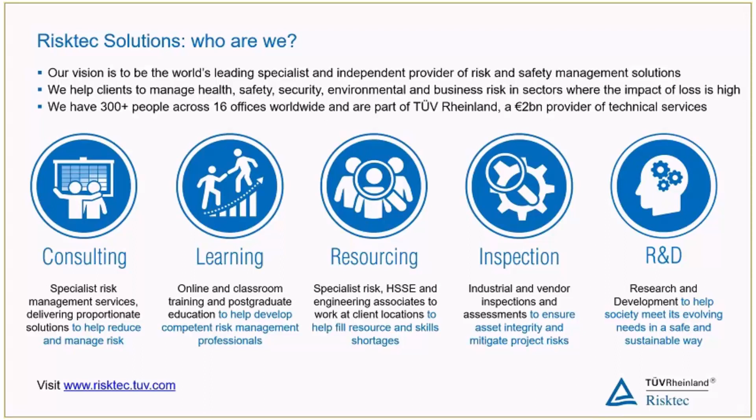Okay, so I'd just like to introduce our speaker today, John Wiseman. John is a principal engineer based in our Warrington office here in the UK. He has over 14 years of quite varied risk management and technical safety engineering experience. That covers a number of high hazard industries, including oil and gas, civil nuclear and defence. Okay, John, over to you.

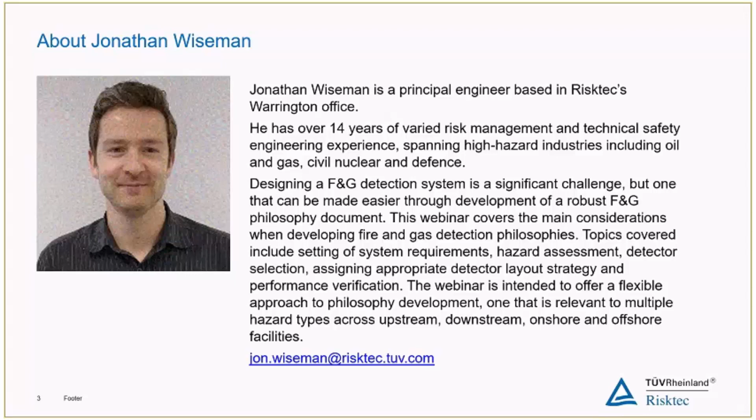Okay. Thank you, Steve. So as Steve said, my name is John Wiseman, and firstly I'd just like to thank everyone for taking the time to listen in on this webinar. I really hope you find it interesting and well worth your time.

Okay, so as Steve said, today I'm going to be talking about the main considerations that need to go into the development of a fire and gas detection philosophy. So I'm not going to talk about the exact contents of these documents, but I am going to cover the main elements and the main process we must go through in both developing a fire and gas detection philosophy and implementation of a fire and gas detection system.

So as we know, during the design stage of projects, many different types of philosophy or design basis type documents are developed, and this is primarily to assist the project as it progresses further into design. However, of these philosophy type documents, perhaps the fire and gas detection philosophy is one of the more contentious or well debated documents. So those involved in fire and gas detection design will be well aware that there are many different opinions and many different solutions in the way that these systems are implemented. So with this, the fire and gas detection system design has a number of challenges.

So the main challenges, I'm just going to go over them now. The first one, so I'm talking about outside process areas here. So the first challenge, what we see when we're implementing a fire and gas detection system, is the lack of publicly available guidance. So whilst guidance does exist for indoor locations, for example here I'm showing NFPA 72, this is mainly a prescriptive approach and is more suited for indoor locations where we have more of an understanding and the behaviour of the hazard is more predictable. We know it's going to be contained within the building itself. So a fire detection system, for example indoors, can follow a more prescriptive regime.

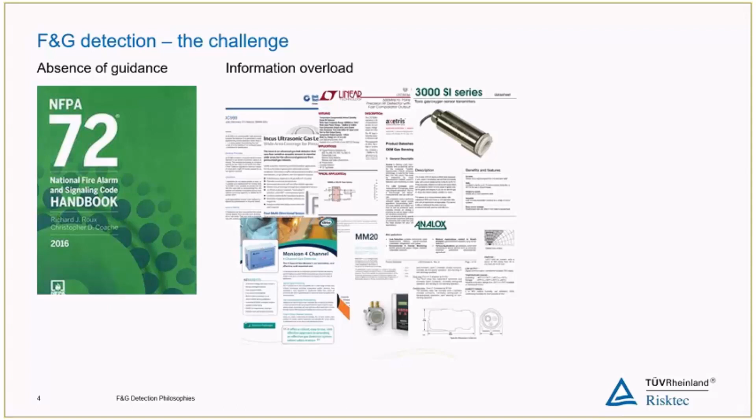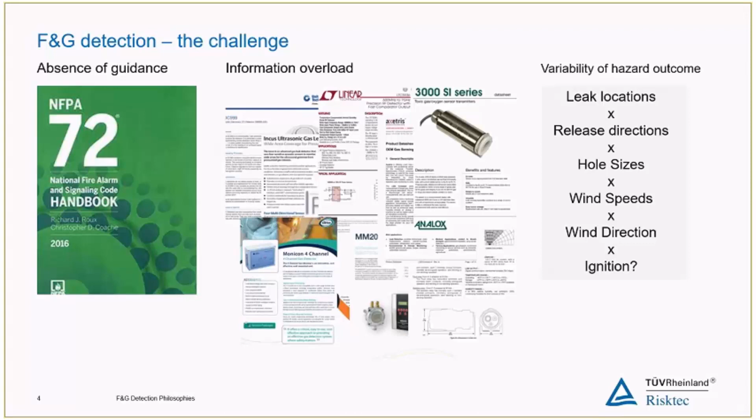Another reason why fire and gas detection design can be a challenge, and perhaps the main reason why historical performance of these systems has been relatively poor, is due to the variability of the hazard outcome. If we take a process facility, for example, we have many different leak locations and release points across the facility, then release directions, different sizes of release, and external factors such as the speed and direction of the wind, and if the release is flammable, whether or not it hits an ignition source. All of these different inputs factor together to give us an unmanageable range of scenarios for which we must design our fire and gas detection system.

Another reason why it can be a challenge is due to the range of different types of facilities in which these systems are installed. Taking two extreme examples: onshore facilities where we've got more space, evacuation routes, and more space for those. Muster points can be located further away from the process areas, and we can also separate process units away from each other. Onshore facilities are also typically more chemical processing, in which case we might want a more controlled shutdown of the facility.

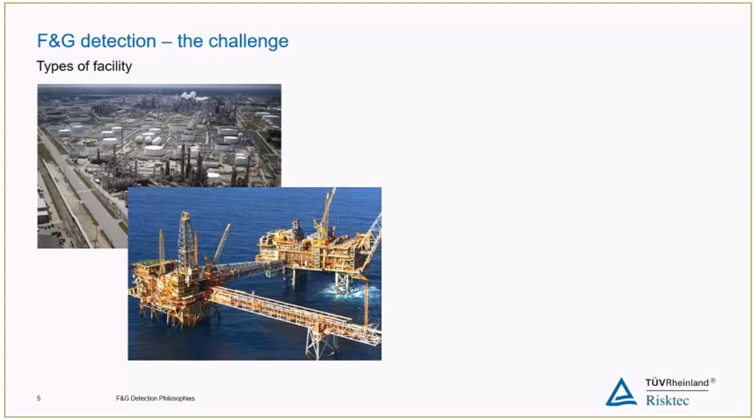Whereas offshore, we've got much less space, the equipment is much more congested, people are working much more frequently in and around the equipment, and they also live near the equipment. With the congestion there is also much more of an explosion hazard that can quickly affect people. So on an offshore facility, our fire and gas detection system may need to be much more quick acting, with an automated response to shut down.

And then finally, we've got the different types of hazard that our detectors must detect. We've got the flammable gas hazard, the toxic gas hazard, and if the release is flammable and it ignites, we've also got the fire hazard. We must install detectors capable of detecting all these different types of hazard.

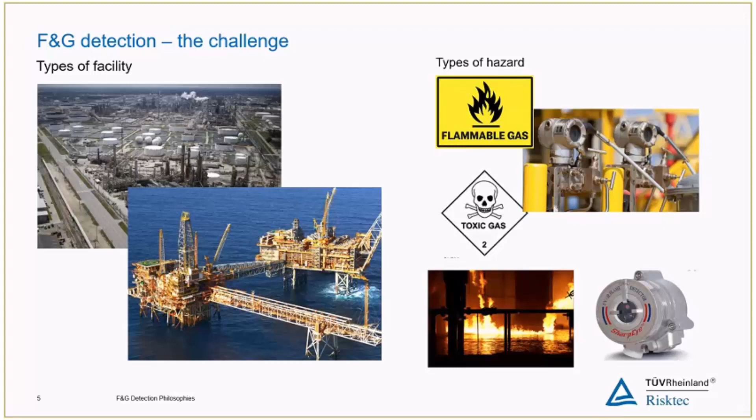Okay, so that's the main challenges we face when implementing a fire and gas detection system. But before I go into the methodology, I just want to go over the limitations and the role that fire and gas detection plays.

Another important point is that the fire and gas detection system is a mitigation system. If we take a bow tie diagram, for example, if the top event in the middle is loss of containment, the fire and gas detection system typically resides on the right hand side. It's a risk mitigation system, and because it's there to mitigate the hazard after containment has already been lost, its performance in terms of risk reduction is much more uncertain.

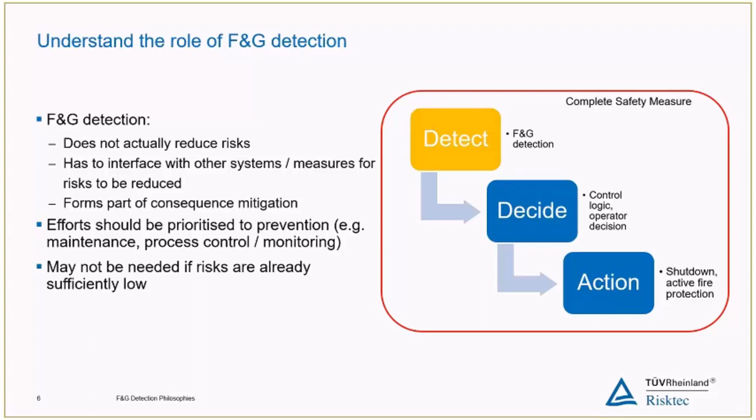So the main objectives of a fire and gas detection system - I've touched on these already, so I'll just quickly go over them. Obviously it must detect, and it must detect the hazard once it's lost containment quickly, in order to minimise the immediate consequences and prevent escalation.

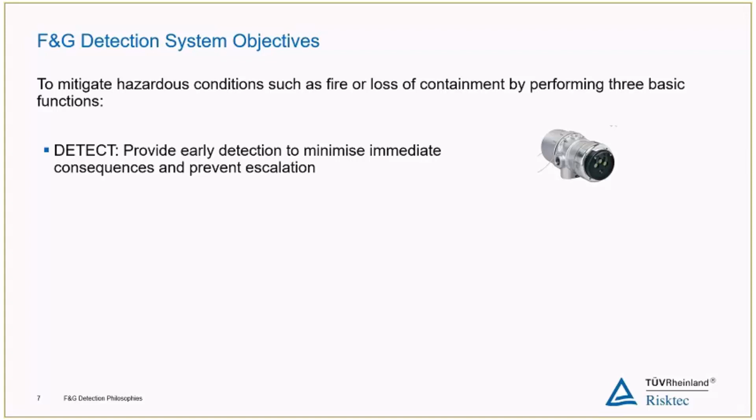It must then go on to alert the operator at a control panel, or personnel located in the field, so they can take appropriate action and maybe evacuate from the area, or an operator at a control panel can take appropriate action, perhaps to shut down the facility.

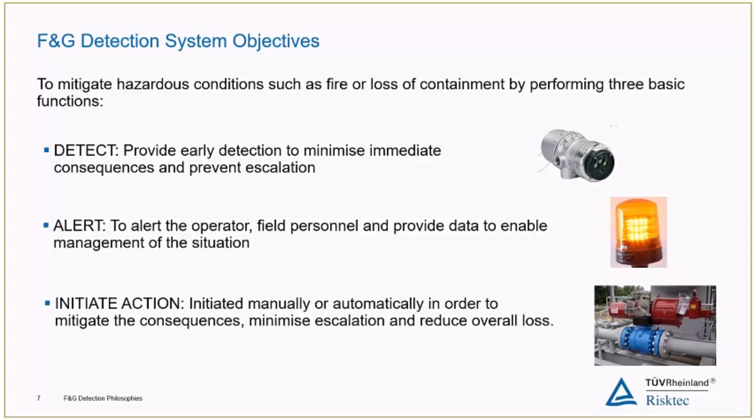And coming out of that, there must be action initiated, either manually by an operator or automatically by the control logic, and that action must mitigate the consequences to minimise escalation and reduce overall loss. So that might be something like isolation to limit the potential inventory that could be released, or active fire protection, for example.

So now we understand the key objectives and limitations of the fire and gas detection system. What are the key stages we should go through to develop a fire and gas detection philosophy?

Understandably, there is a critical link to the hazard and risk assessment. In order to understand the specific requirements on our fire and gas detection system, we must first understand the level of risk, the main risk contributors, and appreciate the risks to asset, personnel, and the environment. Understanding the risks enables us to extend the general system objectives into more specific, facility-specific requirements.

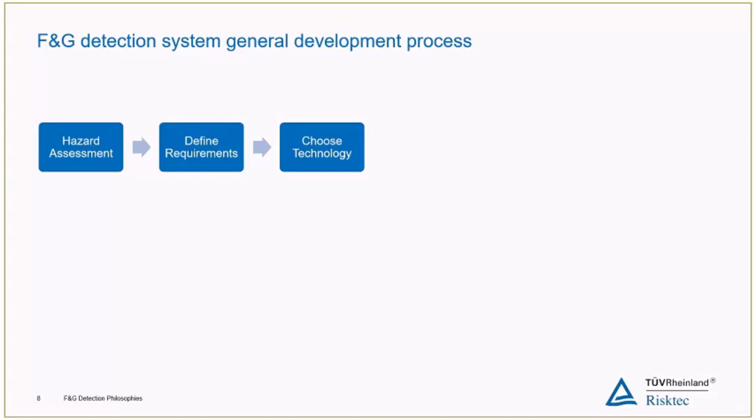And once we have defined these requirements, we are then in a position to choose the right technology that satisfies these requirements and is also suitable for the hazard that is actually being detected.

Following on from that, or very much in tandem with choosing the right technology, we must choose an appropriate layout strategy that effectively mitigates the main risk contributors.

Once we have our layout strategy and our detectors positioned throughout the facility in accordance with that strategy, we are then in a position to assess its performance.

There are a number of performance assessment techniques that I'll discuss in more detail later, but it may be that assessment reveals weaknesses in the system, or it doesn't achieve certain criteria, in which case we may well have to go back to choosing more appropriate, more reliable technology, and then go on to positioning our detectors throughout the facility.

But if we do satisfy the criteria and successfully get through this step, we are then in a position to install, commission and operate our facility.

And throughout these phases we must continually review the performance of our system, and also review our system in case there are any process changes or changes to the layout of the facility, in which case that will likely require us to go right back to hazard assessment and redefining the requirements on the system.

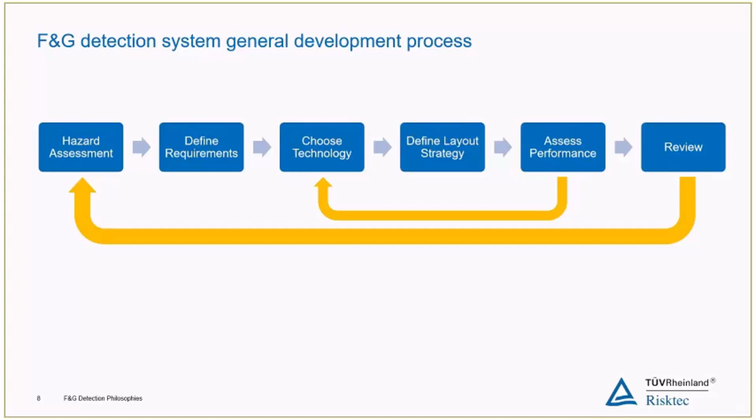So I'm just going to go through these steps in a little bit more detail now. The first step is hazard assessment. As a risk mitigation system, the fire and gas detection system should have very close links to the risk assessment.

And as we know, there are a wide range of techniques for assessing hazards, from qualitative assessment using hazard checklists or checklist type approaches, to more quantitative assessment techniques that may use dispersion analysis or even computational fluid dynamics.

One effective method to visualize the potential outcomes from a release scenario is through use of an event tree. This is primarily used as a quantitative assessment technique. However, it does allow us to visualize the potential outcomes from a release, and which outcomes we may then go on to design our fire and gas detection system for. But as I said previously, the number of outcomes can be unmanageable.

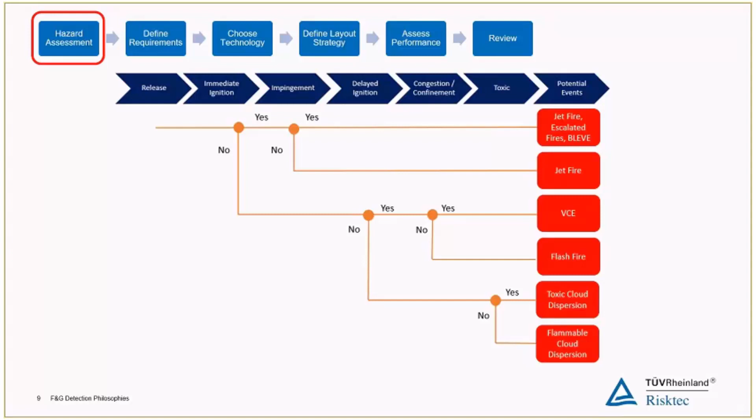If that's the case, then it may be that we want to apply frequencies, probabilities, or even just weightings to these steps through the event tree. That will enable us to prioritize and find out what the highest frequency outcomes are, those that are contributing most to our risk. And from that, we can then tailor our fire and gas detection system to the more dominant risk contributors.

Another approach, and one which is actually very useful for fire and gas detection systems, is more of a simplistic checklist type approach, where we review the material properties, its pressure, its temperature, whether it's toxic, for example, the nature of the release, and also the nature of the release in the environment.

For example, is the release going to be into a congested environment, or are there any congested environments in the vicinity of the release, in which case we may have more of an explosion hazard, and that might be the dominant risk contributor that we design our fire and gas detection system for.

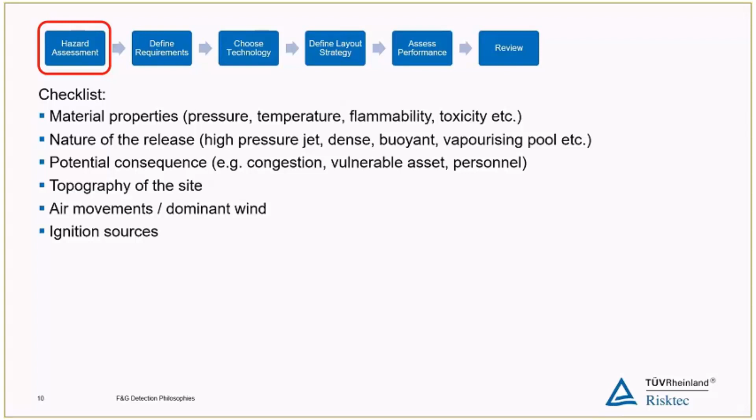Other things that may affect the release: the topography of the site, any dominant wind directions will heavily influence the positioning of our gas detectors. And then, of course, whether or not there are any ignition sources enables us to prioritize where our fire detection goes.

So these are two proposed approaches, but of course for most complex or bigger facilities, analysis is already undertaken as a matter of course. We may already have a quantitative risk assessment or more consequence-based assessment through computational fluid dynamics. And if those have been undertaken for our facility, we can use the results as input to our hazard assessment for our fire and gas detection system.

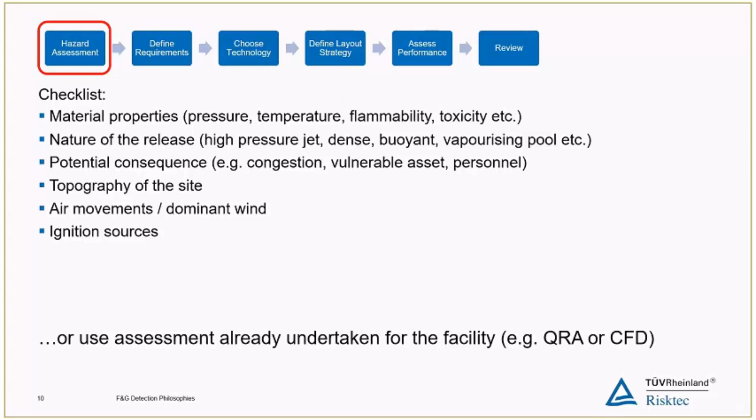Once we've performed the hazard assessment, from that we must define specific requirements that serve to reduce the risks as much as possible. There are a number of requirements we can place on the fire and gas detection system. I've listed a few here. This is by no means comprehensive.

For example, we may wish to specify a specific response time, and this is primarily determined by the speed with which consequences could escalate. So, for example, if it's a congested area and we have an explosion risk, we typically need fast-acting detectors, and equally, if the detectors are in ventilation, we need that to be fast-acting there.

So dampers are closed. Other requirements include the alarm levels. Again, this is very much tied to the speed of a response, but we've just got to be careful that with lower alarm levels, yes, we do get quicker response, but we also are more susceptible to false alarms.

So it's a balance. The size of the hazard we want to detect, which is driven by the proximity of equipment and whether there's any nearby equipment that could escalate the situation. Coverage requirements, the reliability of the equipment and its maintainability, and how the maintainability is driven by how easily accessible the detectors are throughout the facility.

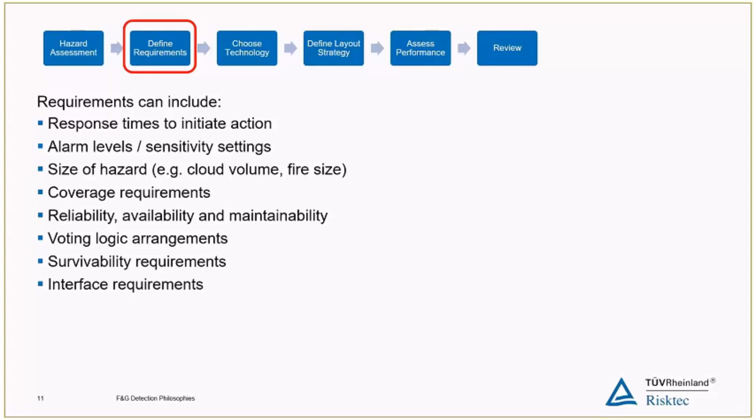The voting logic arrangements, so if we require a reliable signal to shut down, then we may choose to vote shutdown, for example, on at least 2 detectors giving us a signal. Survivability requirements, and then as I discussed previously, the interface requirements and the interface with the control logic and the final action. So that's just a number of requirements on our fire and gas detection system.

But one thing that's important is that these requirements must have a clear pass-fail criteria, so the performance can be clearly assessed or tested. By that I mean usually it's good to assign numbers to things. For example, we may have a detector response time of within 10 seconds, and that enables us to demonstrate more clearly that we are achieving that particular requirement.

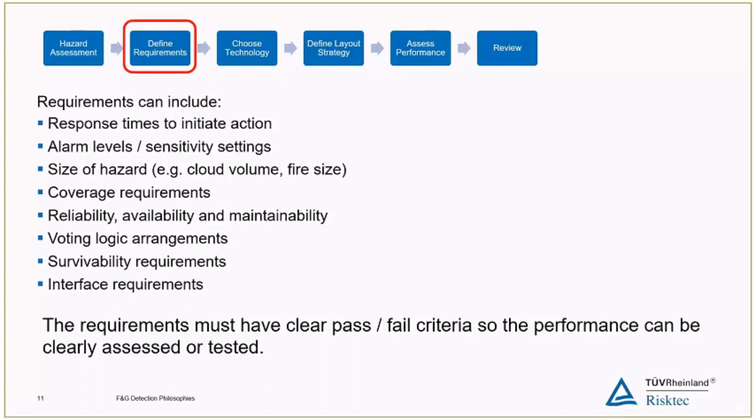So once we've determined our requirements that reduce the risks, we are then in a position to choose the technology. I'm not going to go over the different types of technology here, but the technology of choice must both serve to reduce the risks, but also it must be suitable for the environment it's being operated in.

So we need to take into consideration potential contaminants. Is there dust in the area, sand, the environmental conditions? Is the equipment the detector being attached to, does it have high vibration? What are the background noise levels, particularly for acoustic detectors?

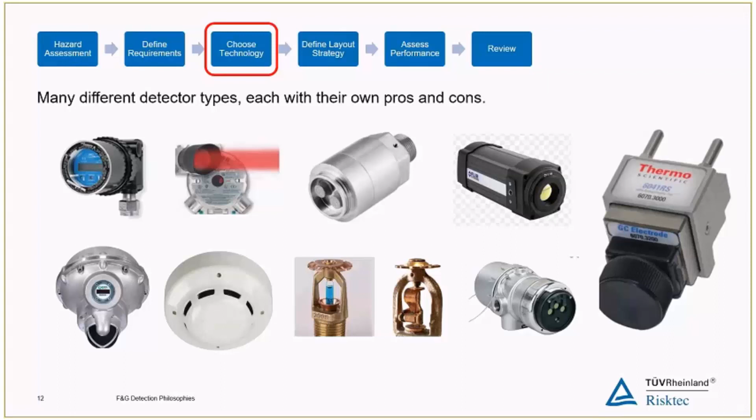And the feasibility of the installation. Is there too much blockage, for example, for flame detectors? The maintenance burden, so do we have to continually calibrate the equipment? And of course another consideration might be the certification of the equipment, so the detector itself doesn't become, for example, an ignition source in a classified area.

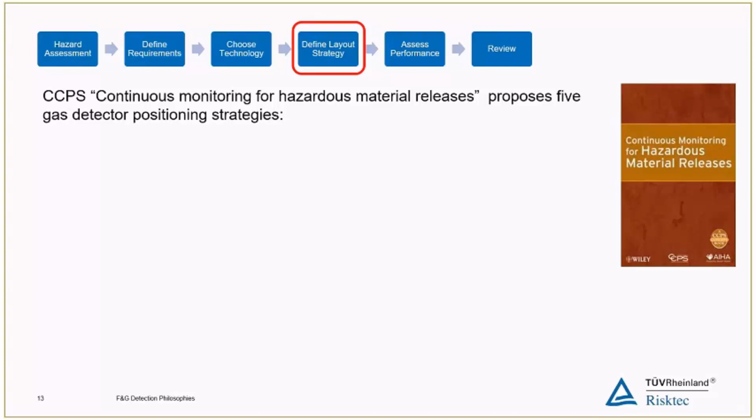Once we've chosen our technology, or very much in tandem with choosing the technology, we must also choose an appropriate layout strategy. There are a number of layout strategies proposed in the CCPS book, Continuous Monitoring for Hazardous Material Releases. So I'm just going to go over these now.

So we've got volumetric monitoring, and this type of detector layout is primarily for protection against explosion hazards. With this arrangement, we are looking to achieve a certain density of detectors throughout predefined volumes, such that a cloud size cannot develop such that if it was ignited, we would end up with a damaging overpressure. So that's very much ensuring we have a sufficient density or an array of detectors throughout a volume.

Another layout strategy is enclosure monitoring, and this is very much specifically for protection of buildings, both positioning of detectors within buildings and also at any ingress routes to the buildings, for example through any sort of ventilation routes into the building.

Another layout strategy is source monitoring. This is more associated with protection or detection of leaks from specific leak sources themselves. For this layout strategy, we might need to have more of an understanding of the nature of the release. For example, we might support any layout we did based on this strategy with consequence modeling, because we need to understand the behavior of the release a bit more for this particular layout.

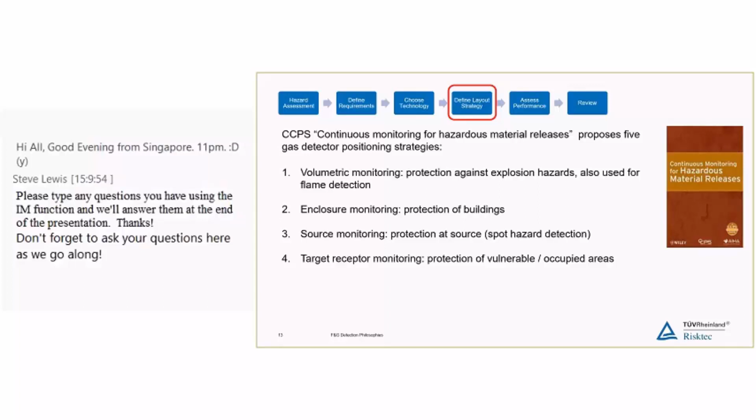We also have target receptor monitoring. Now this is very much positioning of detectors in locations of vulnerability. So that might be, for example, occupied areas or routes through our facility where people walk or congregate. This detector layout strategy is very suitable for toxic detection, where we have a direct threat to personnel and we need to know whether there's a toxic hazard in areas where people are located.

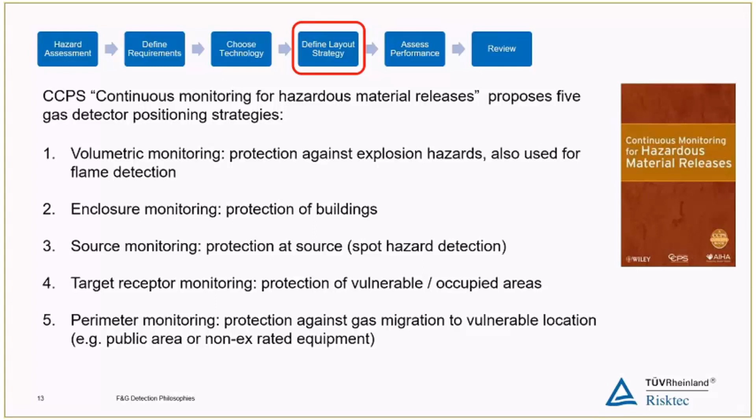And then the final layout strategy is perimeter monitoring, mainly for protection against gas migration to vulnerable locations. This might be perimeter monitoring around a process area, so we know when we've got a gas leak that's migrating away. But also we may choose to put perimeter monitoring around a vulnerable area, for example at the boundary of a site where we could potentially get migrating gas to a public area, or if we have non-EX rated equipment, we may wish to put perimeter detection around that so we can shut it down.

Okay, so once we've defined our layout strategy, and from that positioned our detectors throughout the facility, we are then in a position to assess performance. I'm not going to go into great detail about the different performance techniques, but I'm just going to touch on fire and gas mapping.

There are two quantitative approaches to fire and gas mapping, which is used to verify the coverage across our facility. There is geographic mapping, associated with determining the fraction of the volume in our process area that is covered by detectors. And there is scenario-based mapping, a means of determining the fraction of release scenarios to be detected. I'm not going to go into too much detail on fire and gas mapping.

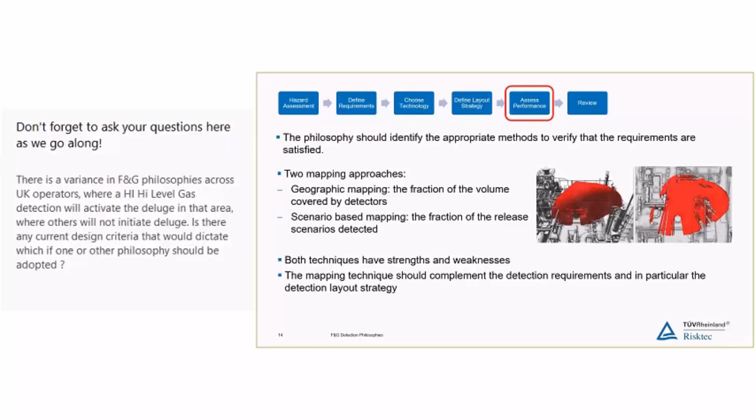Each of these techniques has its own pros and cons. It's a hot topic at the moment, debated as to which is the best technique. But each has its own areas of suitability. Geographic mapping is more suited to placement of detectors where we've got an explosion hazard, a congested volume, and we need to demonstrate that a certain cloud size can be detected by the detector arrangement. Whereas scenario-based mapping may be more suitable for onshore process areas, where geographic mapping may lead to too many detectors, and we need to understand the nature of the release a bit more. So geographic mapping is a simplistic approach, considering the geometry of the area, whereas with scenario-based mapping we're actually assessing the behavior of the dispersion against specific release scenarios.

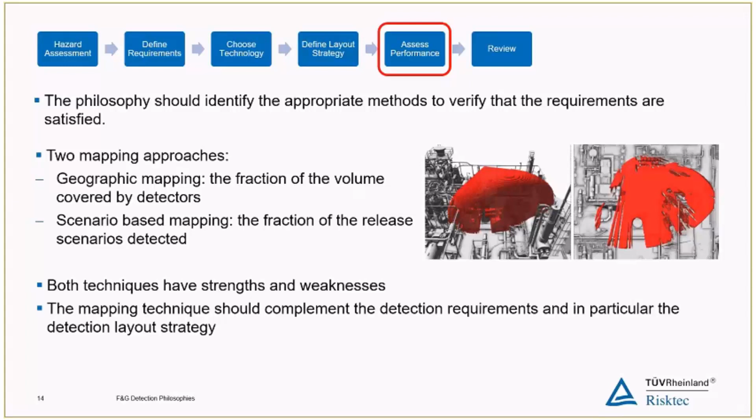So that last point - the mapping technique should complement the detection requirements, and in particular the layout strategy.

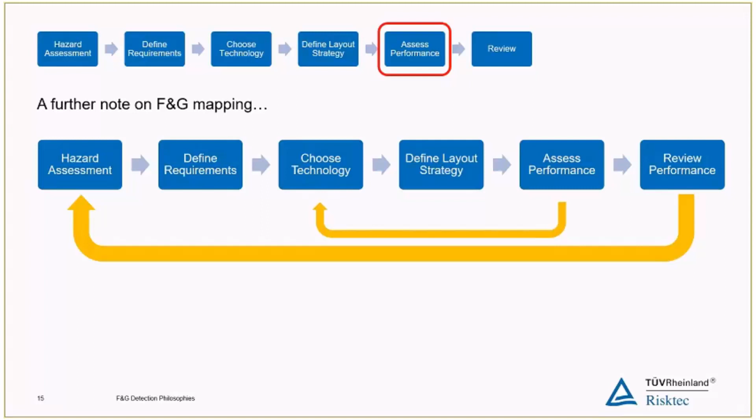One further note on fire and gas mapping. At Risktec we do a lot of fire and gas mapping, but all too often what we find is that the initial steps have not really been completed, and there is a tendency to go straight to the fire and gas mapping exercise in the hope that it will provide you with the optimum solution. But this isn't the case. The way we find the best fire and gas detection solution is through going through these initial steps, through the hazard assessment process and choosing the right technology. Fire and gas mapping should really be used as a performance assessment technique, a verification technique.

If it's suitable. For example, where the layout strategy is prescriptive, such as in buildings or air intakes, fire and gas mapping is not appropriate for those layout strategies.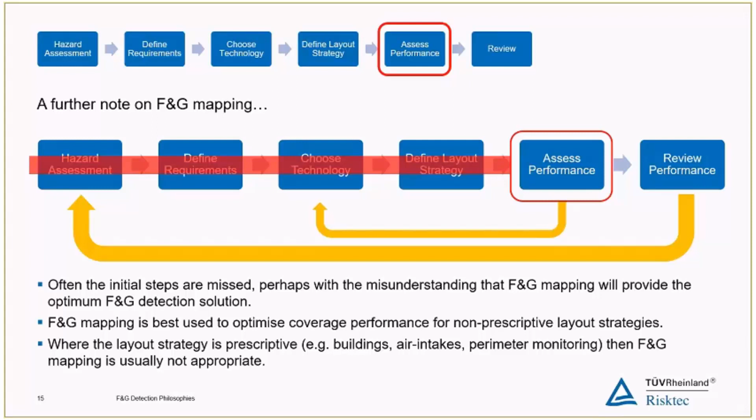And then finally, if we satisfy the requirements, we then go through the process of installing and commissioning our system, and going into the operational phase. Throughout these phases, we must continually review the system performance. As I said, the features of the facility may change, the process might change, which in turn means we need to go back to assessing the hazards and redefining the requirements. If there are any changes as a result of this to the fire and gas detection system, it must be controlled through a management of change process.

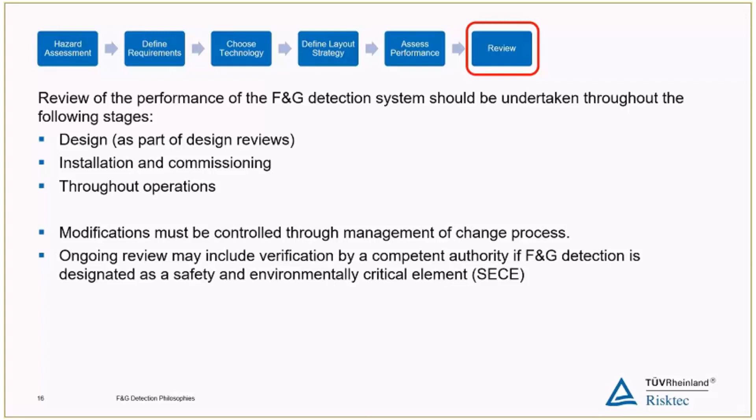And then if our fire and gas detection system is designated as a safety and environmentally critical element, then we will need to bring in an independent competent authority to review the system.

Okay, so I've quickly gone over a proposed methodology there for designing or developing a fire and gas detection philosophy.

So in summary, implementation of a fire and gas detection system is a challenge, and the performance historically of these systems hasn't been great. This can be put down to perhaps the lack of guidance and the difficulty in choosing which hazard or which outcome we are designing our system against.

And so to counteract these challenges, it's important that every project or facility has a fire and gas detection philosophy in place, so there is an agreed basis on which to design the fire and gas detection system. Having this in place ultimately ensures that the risks are reduced in an effective way, and we can all be confident that our system is performing for the main risks at our site.

Ultimately, this will improve the safety at our facilities, having this structured approach.

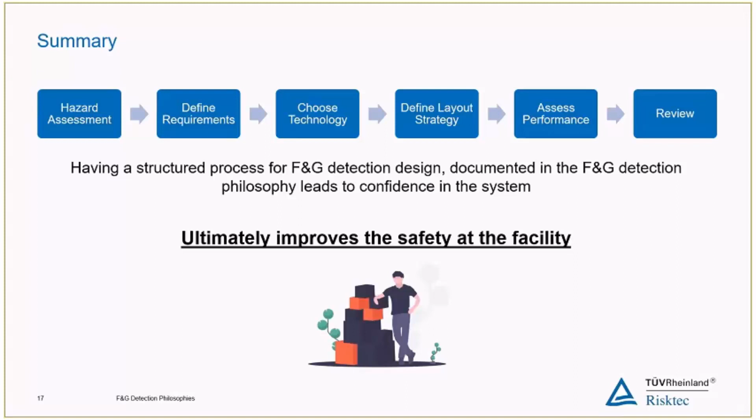Steve, have any questions? Okay, so thanks very much there, John. We've got a good 10 minutes. Normally we get lots of questions, so either you've been 100% crystal clear, John, or we encourage people, if you do have a question, put it in there. But anyway, we have a question to get us going from Howard.

There is a variance in fire and gas philosophies across UK operators, where high level gas detection will activate the deluge in that area, where others will not initiate deluge. Is there any current design criteria that would dictate which of the two philosophies should be adopted?

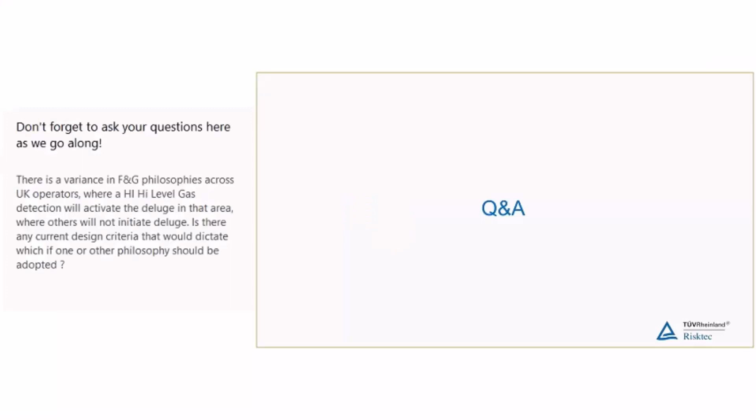So currently, I'm not aware of any design standard for that specific requirement. I think what I would say is that we need to put it through the process, assess our risks, and also consider the speed at which we need to initiate that response. So just put it through the risk assessment process, and as long as it's documented and everyone can review it, then we can implement the system for that particular scenario.

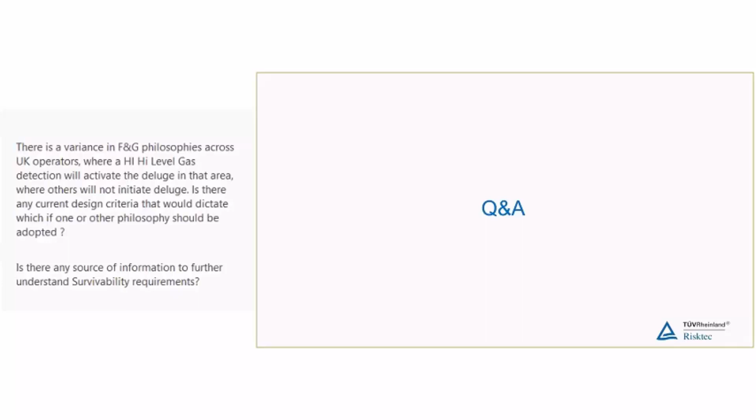Okay, thank you. Question from Jacqueline. Is there any source of information to further understand survivability requirements?

So survivability requirements is a very specific thing. Typically for fire and gas detection systems, if the detector head is damaged, then that by default goes to an alarm signal. So on that basis, because it's fail-safe, there are no specific survivability requirements, but we need to consider both normal operations, the environment it's operating in, is it suitably protected from the conditions. It may be that we have a specific survivability requirement on the detector, in which case we might need to design a bespoke solution against that hazard.

Okay, thanks, John. Just as we're waiting for other questions, I had a couple of questions that occurred to me. I think a lot of participants on this webinar are going to be familiar with fire consequence modelling, gas dispersion modelling, but perhaps a little less familiar with fire and gas mapping. So can you explain the difference between the two?

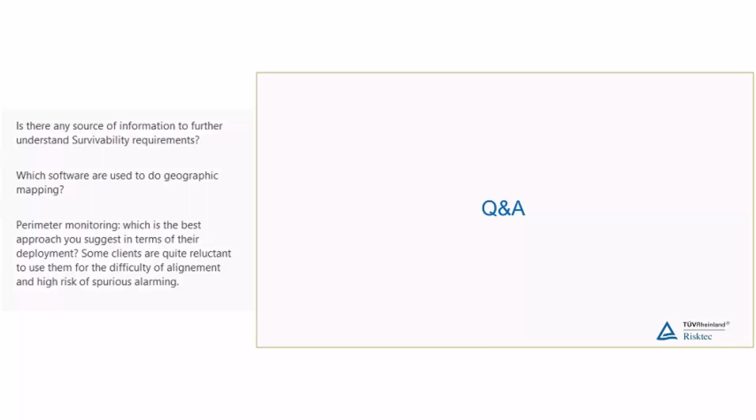So there are two methods of mapping. There is the geographic mapping, and then there is the scenario-based mapping. The physical effects modelling or dispersion analysis is very much used in the scenario-based mapping approach, where we need to understand the nature of the specific releases, and we need to know where the hazard is going to be located throughout the facility. We may have a particular target on the system, such that a certain fraction of detectors see the hazard. So the scenario-based mapping approach is very much dependent on physical effects modelling and understanding the physics of the release, whereas the geographic method is a more simplistic approach.

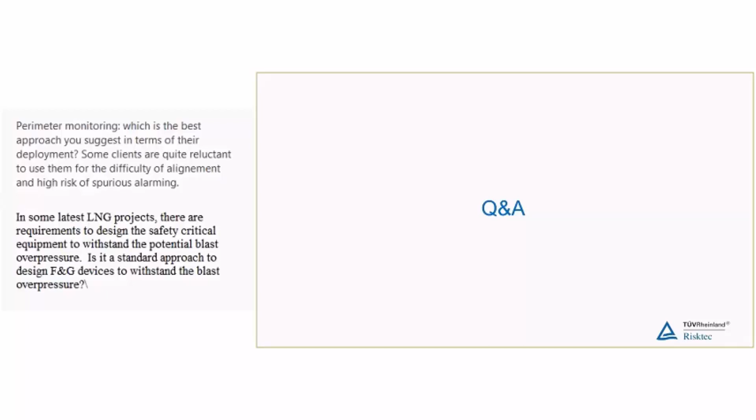But that doesn't mean it's any less useful. It's just a different approach for a different type of area. It's typically used in congested areas, where we idealize the hazard for geographic mapping as a spherical hazard, so we typically use a spherical gas cloud. The geographic mapping approach is very much a geometric exercise with a spherical gas cloud that is mapped throughout the area.

Great, thanks for the explanation, which leads nicely onto a question from Elizabeth. Which software is used to do geographic mapping?

Well, there's commercially available software. There's the likes of Detect 3D or Hazmap 3D. However, many consultancies, including Risktec, develop their own in-house software.

This software incorporates ray tracing techniques for flame mapping, for example, where we need to fully understand the blockage in the area. There is commercially available software, but the underlying calculations can also be performed using in-house software. At Risktec, we have our own in-house software that we use on a lot of our consultancy projects.

Thank you. Question from Ilaria about perimeter monitoring. Which is the best approach you suggest in terms of deployment? Some clients are quite reluctant to use them due to the difficulty of alignment and high risk of spurious alarming.

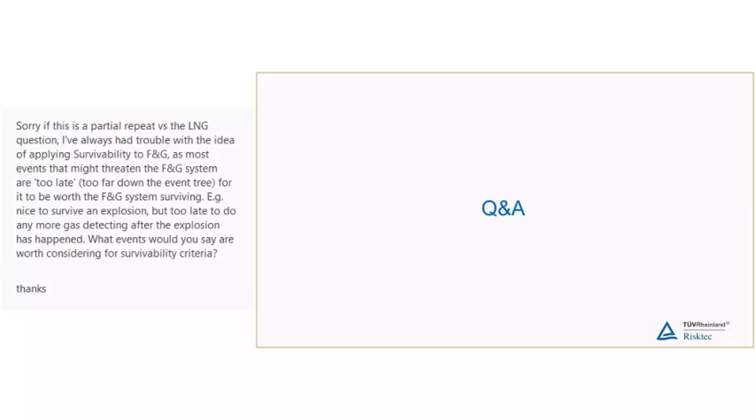The thing is, if we're designing for that, the incident has already occurred at that stage. As I said earlier, it's typical for detectors, if damaged, to go into an alarm state. So if they are damaged, we do have an alarm at the control panel, or at least a signal at the control panel. Typically we don't have overpressure withstand requirements on detectors. However, there may be specific requirements on the project, in which case we might have to think about protecting the detector in some way. But usually, if an explosion has occurred, that's after the requirement for detection.

The final question was from Chris, who in his introduction said pretty much what you said, but his final point was: are there any events worth considering for survivability criteria, recognizing that the explosion has already occurred?